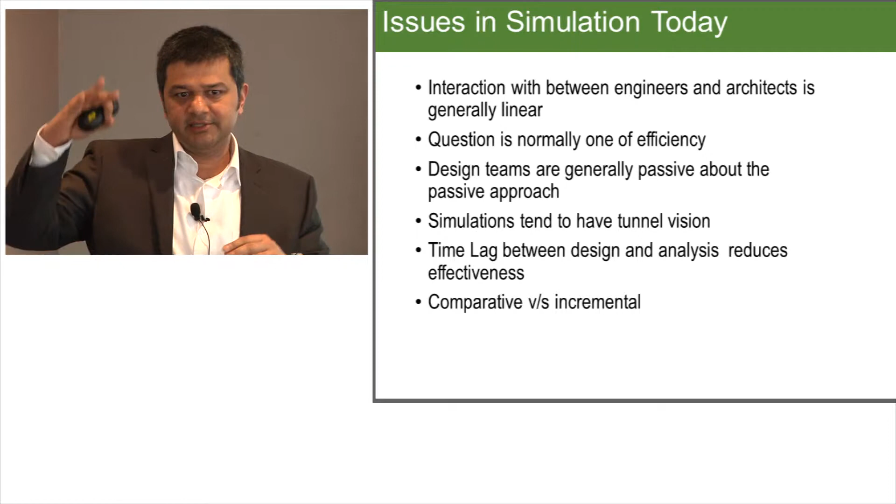And then simulations tend to have tunnel vision. And by that, I mean, you look at single points in time very often, especially when you're doing daylight analysis or solar insolation, June 21st at noon, December 21st, summer solstice, equinoxes. But in reality, sometimes the real issue is somewhere in the middle. So can we start thinking about programs that address the entire spectrum?

This one's actually really important. So there's a time lag between the design of something and the analysis and the feedback that you get from that. And really good analysis, I think, is kind of shortening that gap. So can we figure out ways in which we can shorten that gap? So as you're asking the question, you're getting feedback. Because really, the crux of this is, it's not about the answers, it's actually being able to ask the right questions. And then there's comparative modeling versus incremental modeling.

And by that I mean, comparative modeling is if you take building A, building B, and building C, and you say A is better than B, B is better than C. But why is A better than B? And very often that's where the black box programs that we use fall short, because it actually doesn't inform your intuition to tell you, well, what are the incremental steps that you take to get from A to B? What makes B better than A? So that's really important.

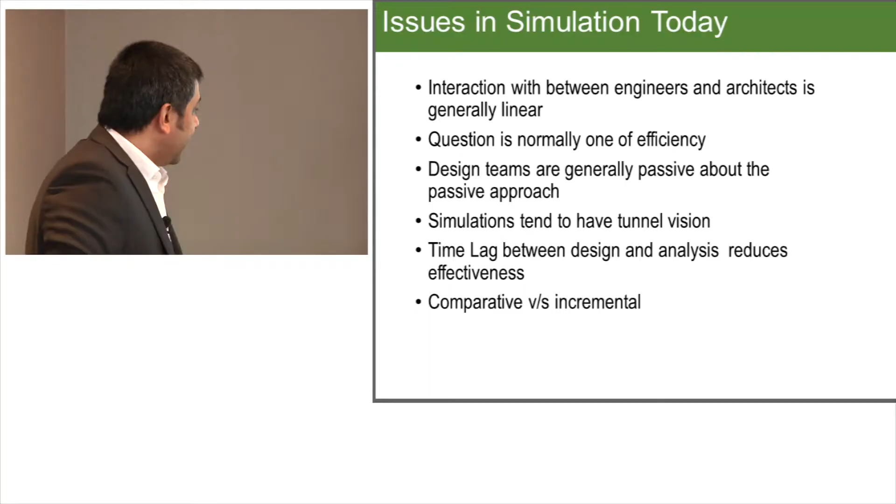You've all probably seen or heard this. All simulation models are wrong. So why do we model things then? Because some of them are useful. And this was a mathematician called George Box who came up with this theory. It's like, if we can find the useful models and not worry so much about whether they're exactly right or wrong, then we've achieved something.

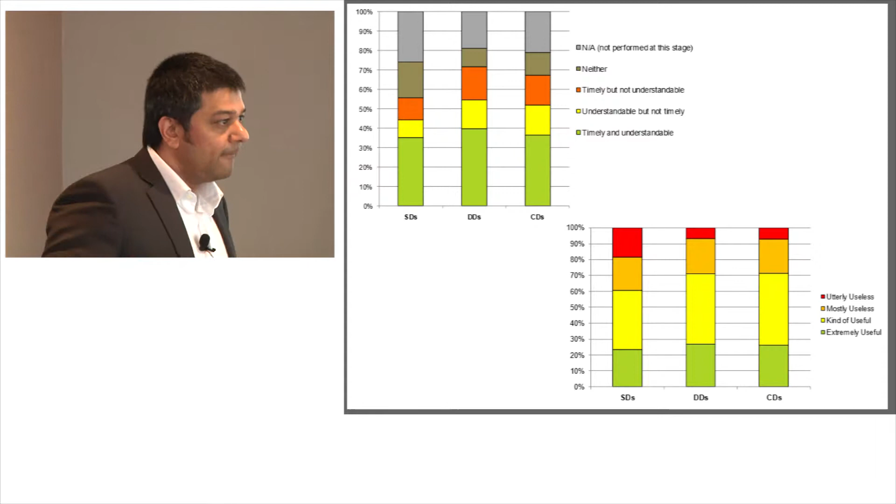So a while back, I did a survey of project managers in our office, this was a firm I used to work for, about how they use energy models and how useful they were. And that's schematics, design development, and CDs. And what we found was that the number of models that were both timely and understandable was staggeringly low. That's 30%. That's below Congress's approval rating, I think, I'm not sure. So we're not doing a very good job.

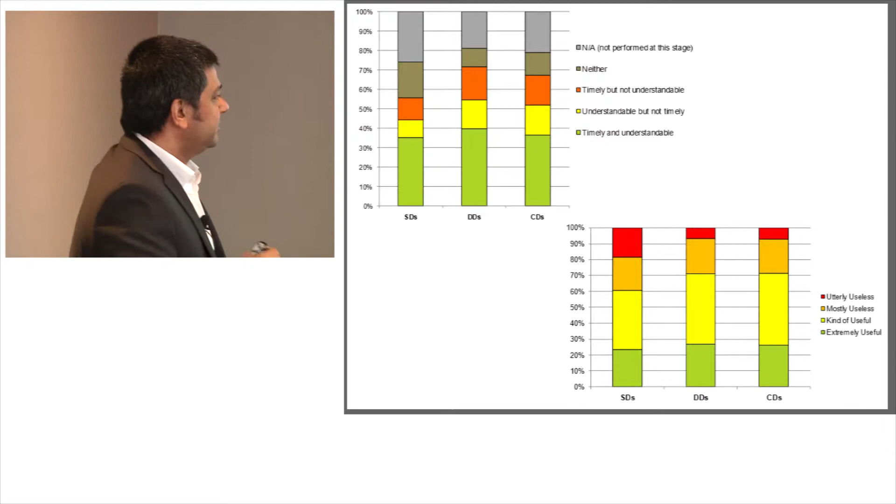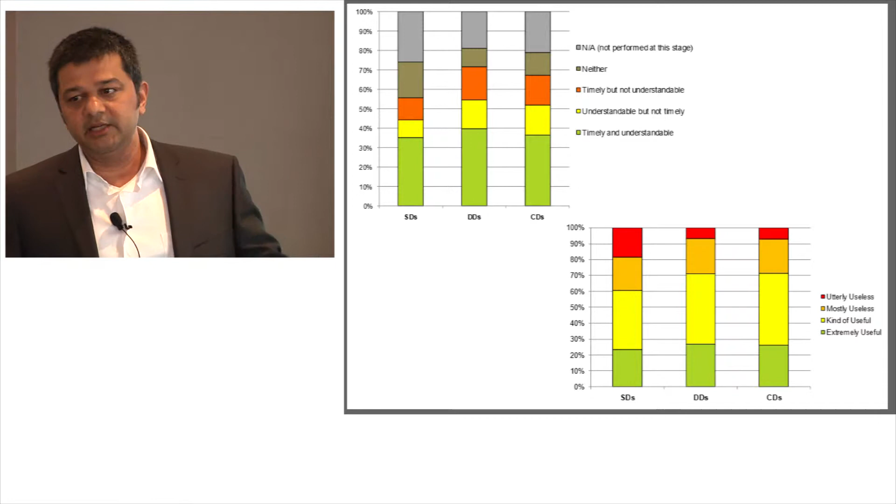What's actually even more of a concern is we're doing a really bad job in schematic design when the decisions are really crucial. And then we also asked them some subjective questions in terms of, do you find them useful? Do you find them very useful? There's actually quite a large percentage who said they were utterly useless. And I wasn't questioning design modelers. I was questioning project managers, the guys who take decisions, the boots on the ground. And so that's really a concern for me.

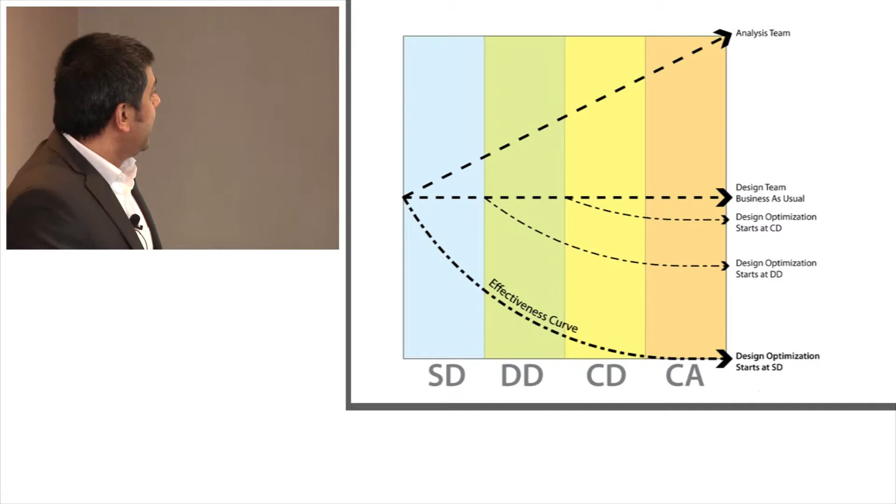The minute you start thinking about things over here, you've made the big decisions on your project. It's too late to do anything. So if you think about it, at some point there's an analysis team as well looking at answering questions related to the project. And as you go through the project, that information gap increases. And so what happens is, if you do a model input here, by the time they analyze it and get it back to you, you're over here. You might have gone 4 steps in the process.

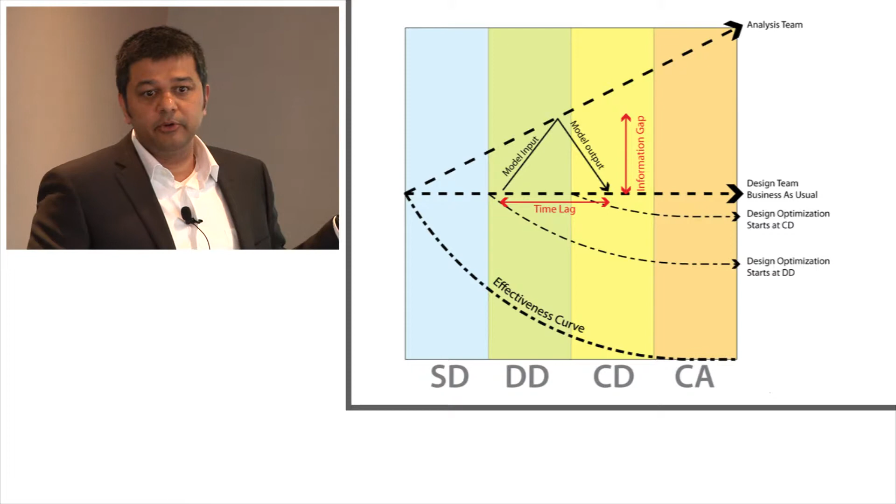And that time lag is based on an information gap, really. So the more information you give them to crunch, the more stuff they have to crunch. Basic, right? So what we're really looking at is a process that looks like that, where you start early and get iterative with your modeling. And it doesn't matter that you're not asking the big questions in terms of, what's my total BTU? We shouldn't be asking kBTUs per square foot questions over here. We should be asking more pertinent questions about our projects at that stage. And really what I'm focusing on in this presentation is that stage of the design.

What are we modeling then? How can we be more efficient? And really, and I can't stress this enough, it's not about finding the right answers then, it's about asking the right questions. And that is really important. And the minute you come to terms with that, you're actually more comfortable about, hey, it's okay if it's slightly wrong. If it's taking me in the right direction, it's fine, right?

So, the design process is cyclical. You start with a hypothesis, you break it down, and you analyze the bits, right? So you go from hypothesis to analysis, and then you put it back together, hopefully in an artful way. And that's your synthesis. But then you go through that cycle again, you find a new thing to study, right? So it's a process that builds upon itself.

And then we use tools for this, right? And the secret to this, and it's really important, is there's more than one. And that's key. What we tend to do in our processes is kind of focus on the one tool, whether it's Grasshopper or Sefaira or Ecotect or whatever. It's like, I'm going to use that for everything that I can do. And in my mind, that's the wrong approach.

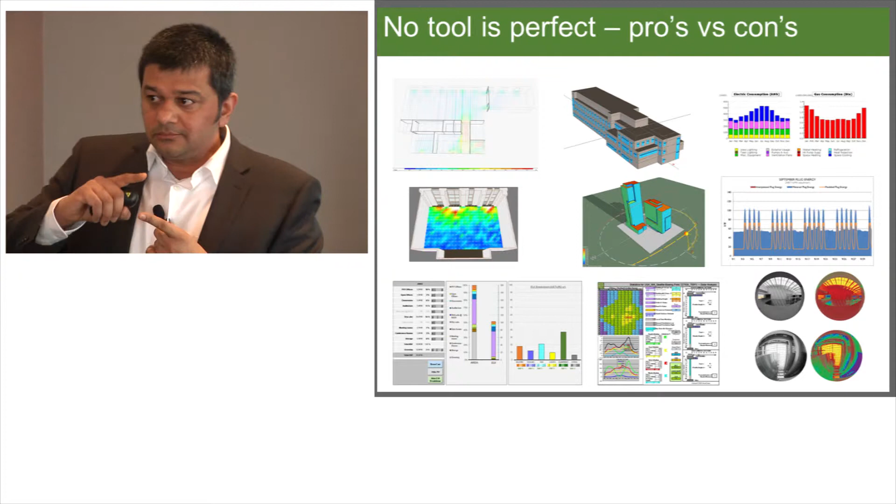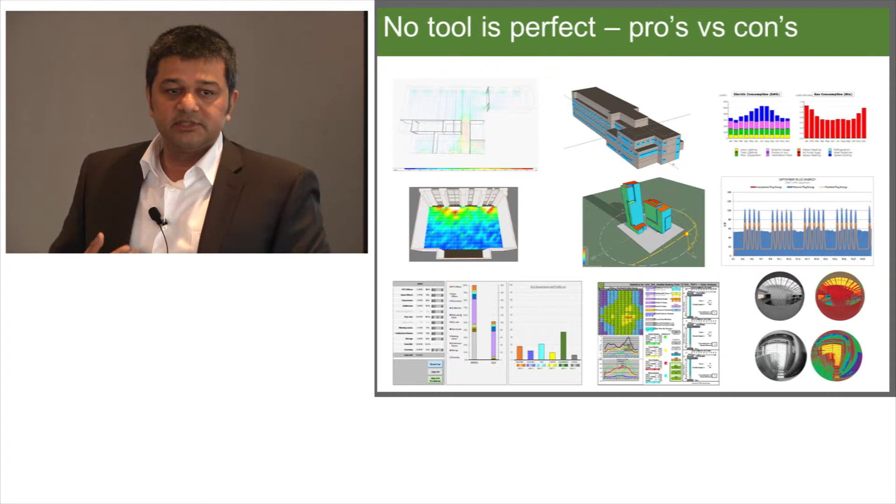But it involves getting your hands dirty, understanding building science, really important. I can't stress that enough. Before you delve into the realm of these things, understand what it is that these tools do, understand what the inputs are that you're putting in, and really importantly, understand what the outputs you're looking at are.

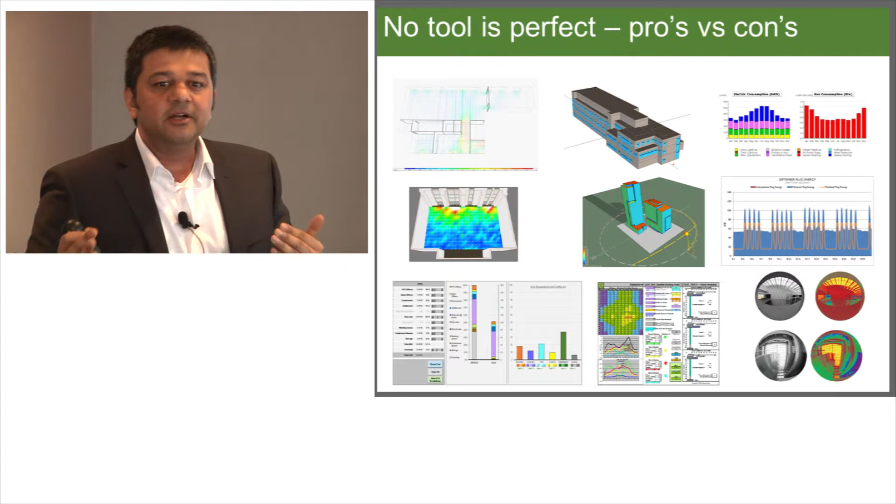So just because it's giving you blues and reds and greens, that's not analysis. That's modeling. Analysis is what you do with the data afterwards. So use your toolbox, get familiar with your tools, and the most important tool is really the ability to question, the ability to ask creative questions. And this is why I think design is really an analysis process, right? And so analysis is a design process too.

So just as an example, we look at an analytical timeline. This is intentionally blurred out because I didn't want to get into the weeds of talking about different programs. But you can look at it this way. If you look at a timeline for a project, you have different things that you study at different stages. So early on, you might study massing, orientation, climate, benchmarking, what's the realm that we're looking at. Slightly later, you might start to study your skin, daylighting, basic HVAC systems.

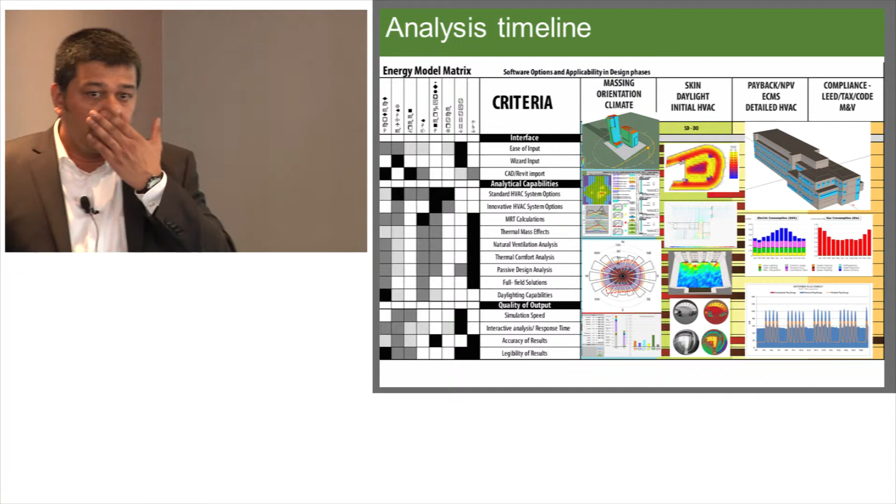And then as you go through, you get more complicated. So really, at this stage, you shouldn't be worried about whether you have a reverse cycle chiller or not, you can sort those out later. What you should be worried about is, what's the climate I'm in? What are the resources available to me? What's the benchmark? What's my building type? What should I be expecting?

And then these are different criteria that we look at, from ease of input to standard HVAC systems. Does it have a wizard? To simulation speed, accuracy. And each of those criteria are more valuable at different times in the design process, right? So right up front, you don't care about the accuracy of results. But over here, you don't care about wizard inputs, right? You're doing compliance modeling, LEED modeling, or whatever. You don't care about a wizard at that point.

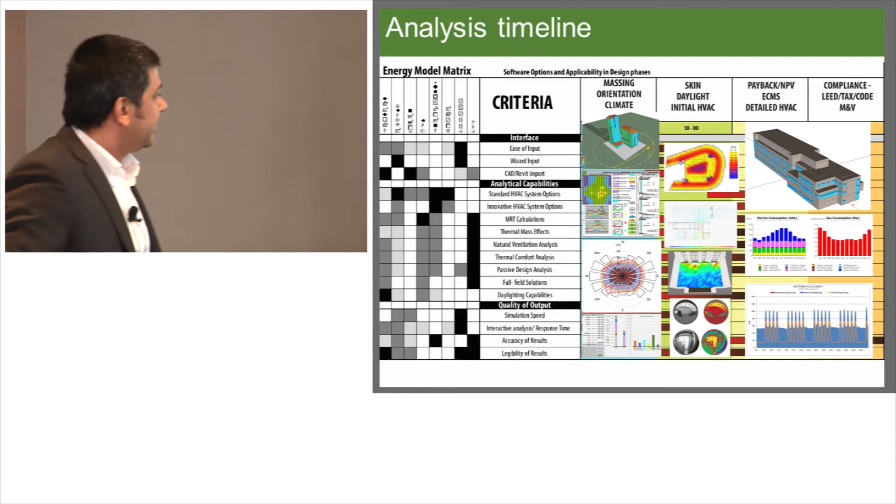And then over here, you have different programs. This is just my rating for them, but you might have a different rating depending on your ease with the programs. And so you score them for each of these criteria. So now I can say, okay, if I'm at this stage, this is important, which ones score high in that realm, and I can pick the tool for the right task. And this is just one way of looking at it. So maybe there's different tools that fit in at different points in that timeline, from daylight analysis to glare analysis to simple dashboard type tools, benchmarking, orientation, solar, all of that stuff.

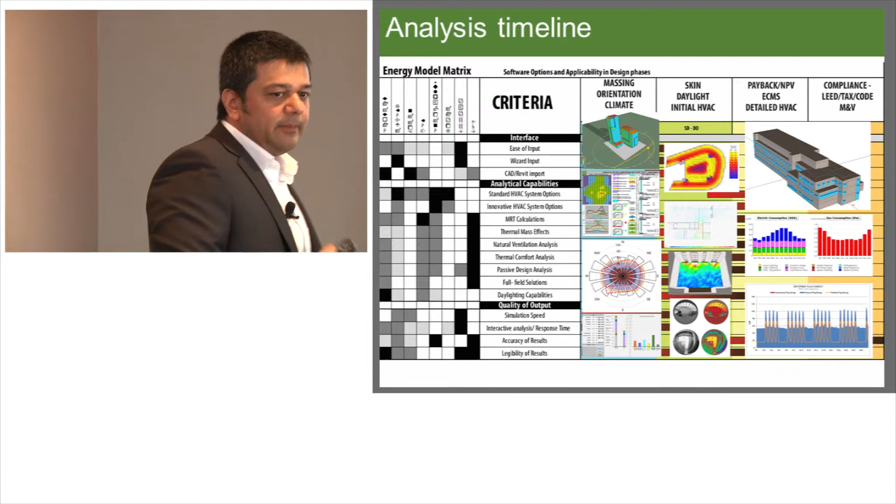And so I'm a real big fan of dashboard type tools that give you real-time feedback.

How are we doing on time?

Okay, so if we have time at the end, I'll get into a couple of these dashboard tools. One of them looks at solar shading and things like that. The other one actually looks at setting energy benchmarks relative to finding opportunities for net zero energy. But the important thing is we use these upfront really early to establish design strategies.

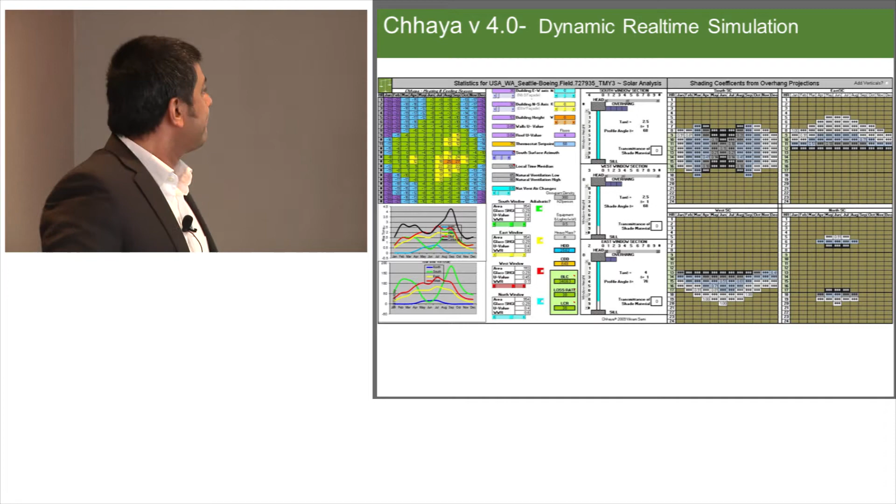This was a project, a patient bed tower that we did in Dallas. I used the dashboard tool, which is a simple Excel tool that we developed, to understand the impact of shades on a southwest facade. Now, for a patient bed tower at the time, 6 air changes per hour is what's required by code. What we wanted to do was make sure that we didn't exceed that. If you exceed that, you've got to buy a bigger air handler, bigger ducts. So it's an increased first cost.

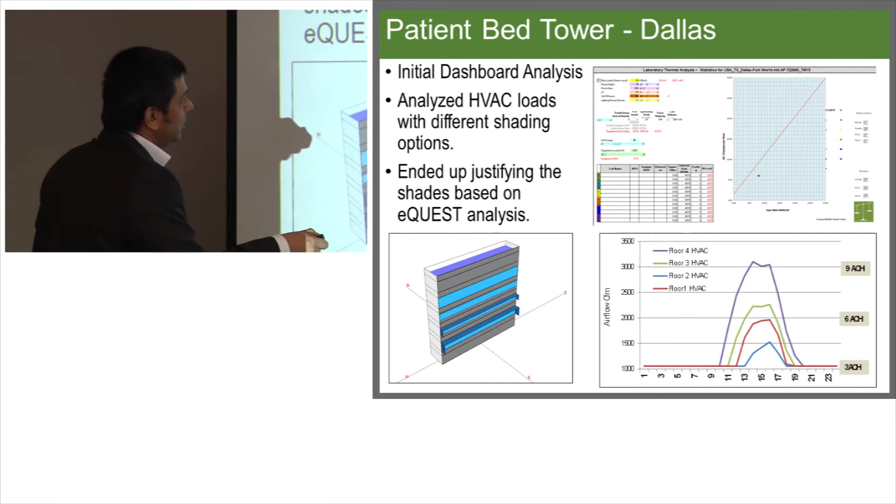So we're in a meeting with the client, and he turns around and says, why do I need to pay for those shades? So I open up the dashboard. While we're having the conversation, within 2 minutes, I'm able to run these scenarios. This thing actually looks at air changes per hour versus equipment loads. And you can pick your orientation. The red dot over here is where your room is at. If it's below the line, it means it actually needs additional cooling. If it's above the line, it means it's actually reheating.

And so we were able to turn the shade on and off right there and figure if you went without the shades, you'd move up to 9 air changes per hour in those patient towers, in those patient rooms. So that took it off the table at that point.

Then I was able to go into eQuest later on and actually model those airflow rates to figure out what the system was actually moving through those. So this is the eQuest model over there. And got validation that it was about 9 air changes.

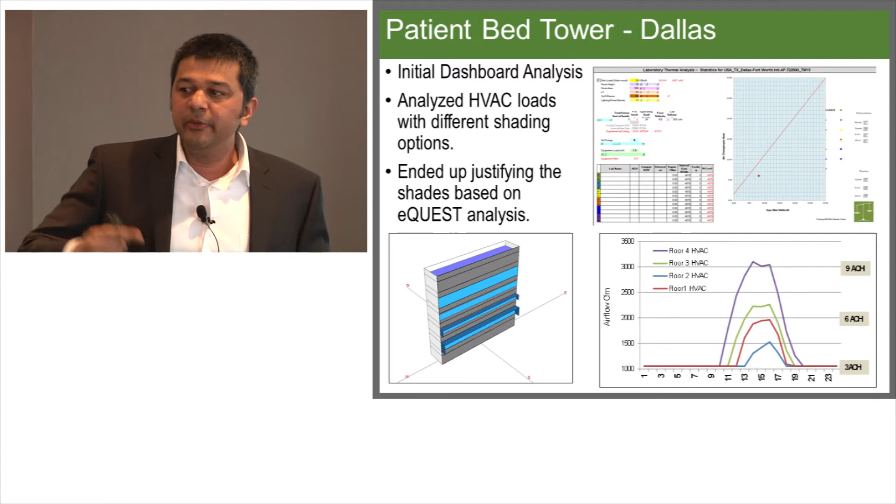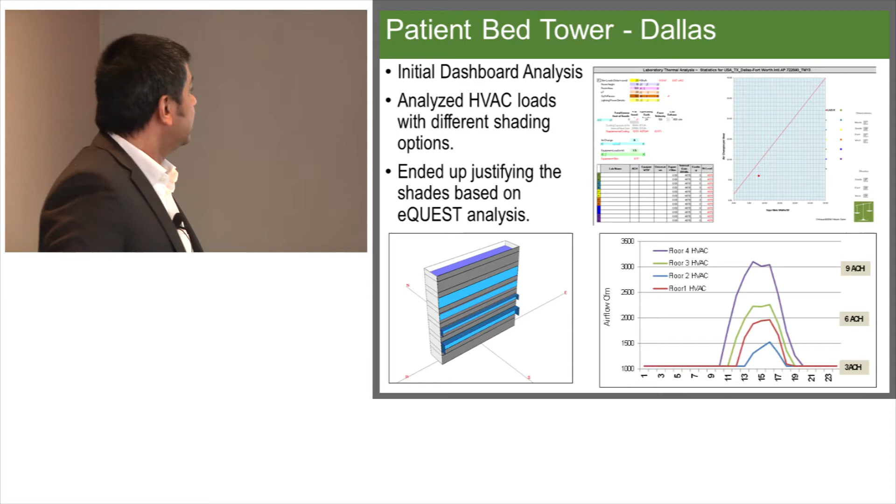Now, if I was to actually start off with the eQuest model, it would have taken me about 2 weeks to set that up, run it, come back with credible numbers. At that point, the shades would have been out of the building. And then we'd have been fighting to get them back into the building. So having this dashboard tool up front helped us keep it in the process. It helped the shade stay in the project. So sometimes speed is really important.

So we use different metrics through the process. You guys are all familiar with these, hopefully. EUIs, WUIs, or triple UIs as we call them, and carbon emissions. The other ones that we're starting to see more of now are things like daylight autonomy, so that's looking at climate-based daylight metrics. So is everyone familiar with daylight autonomy? Show of hands, okay. So it's looking at how often in this climate, so it actually uses a weather file, can you turn off your lights based on actual climate data?

With that, we also do glare analysis, so understanding predicted glare, and that's one of the lessons learned from a project that I'll show you in a bit. Things like comfort, predicted percentage dissatisfied. As we get into more passive analysis, we're seeing more of that. And with clients, really, you've got to put them at ease with comfort calculations. So we've recently started to look at programs like IES that help analyze passive systems better than eQuest.

The other thing that some of our clients are starting to look at is things like absenteeism and productivity, because really, those two things affect their bottom line far more than energy use or even first cost does. That one's really important. And then there's other metrics that are different for each project. So there might be a project-specific metric that you come up with. And that's really important, is to come up with success measures for your project specifically.

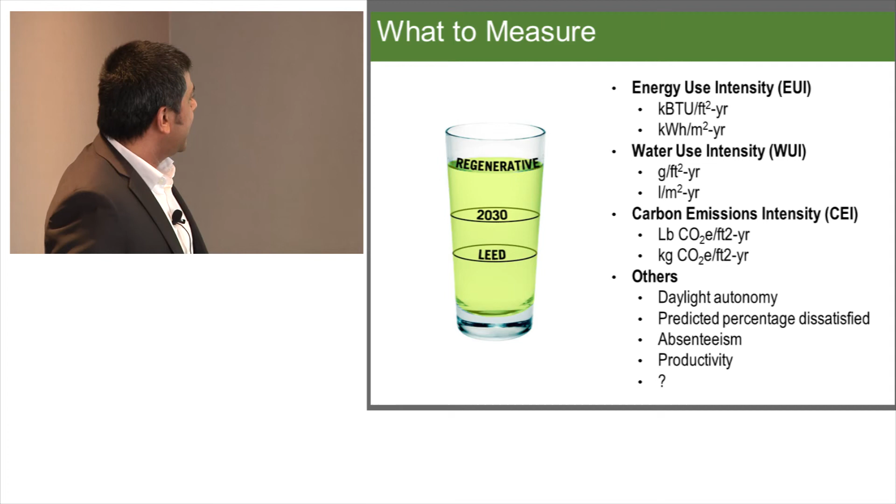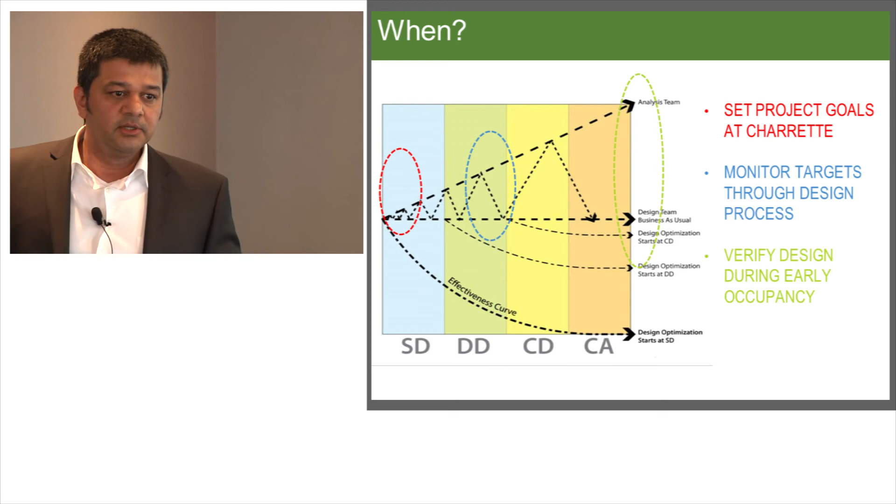And then, so the idea is you constantly monitor this. So you set your goals at the charrette or at the kickoff or even before that, through benchmarking, through early modeling. And then you monitor your targets through your design process. So really, analysis is a continued process. And I work very closely with our designers all the time. So I actually go to client interviews where we talk about this, and then we follow up through the process. And I find that talking about it at the interview actually keeps it in the client's mind. So it's really important.

And then the other thing is to understand that it's all a cyclical process. So you start with the benchmark, and then you design, analyze, and hopefully redesign a few times. And then eventually you construct it, and this is where typically we walk away, right? That's the end of the process, we've done our job. But now we're seeing the paradigm shift. So we're going back and operating the buildings.

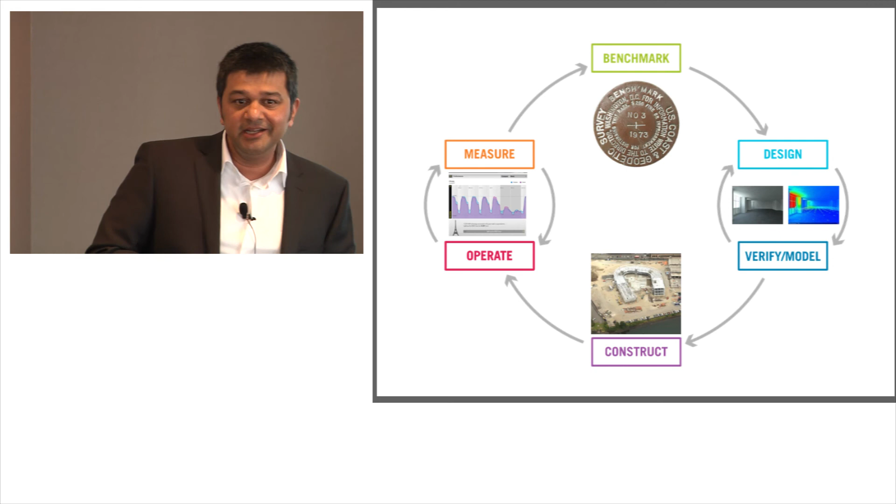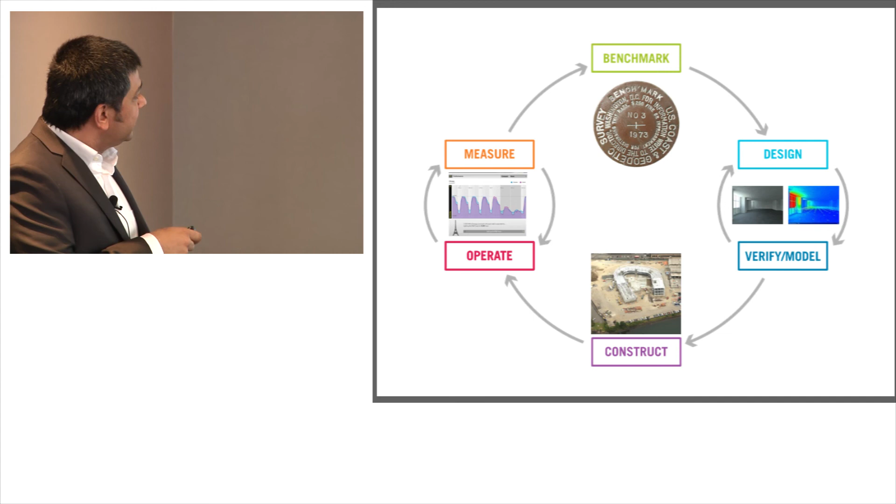We're working on our third design, build, operate, and maintain contract, where we're actually responsible for the final EUI. It's an EUI guarantee. And it's scary, but it's exciting too. I think that's a direction that we're going to see the profession go to more. And so that involves measuring and setting up your building to be measured. And then hopefully tweaking your operations. What's important is then you go back and you reassess your benchmarks, and that's really key, is to understand that the benchmark isn't a static number either.